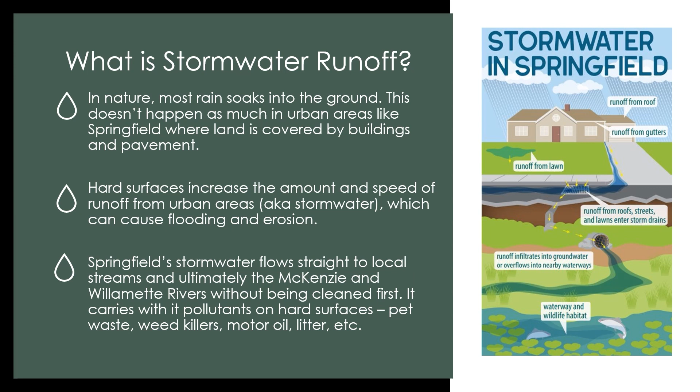Because stormwater runoff from urban areas is one of the main sources of water pollution and alteration of hydrology, it is regulated under the Federal Clean Water Act. In Oregon, the Department of Environmental Quality, or DEQ, implements the requirements within the Clean Water Act on behalf of the Environmental Protection Agency. The MS4 permit requirements are the primary mechanism for ensuring our water bodies are swimmable and fishable. These permit requirements cover public education and outreach, elimination of illegal discharges to the stormwater system, preventing erosion at construction sites, and more.

Directing runoff from urban areas to post-construction site runoff controls, such as rain gardens and swales, is one of the most effective ways to recreate natural hydrology and remove pollutants from stormwater runoff. The City of Springfield is mandated by its MS4 permit to require post-construction stormwater controls at public and private developments. This includes building new impervious surface and the replacement of old impervious surface.

The first step to reduce the negative impacts of stormwater runoff is to implement practices that reduce hard impervious surfaces in the first place. Reducing building footprints and using porous surfaces are two examples of this. The runoff from the impervious surfaces at a site must be collected and retained by one or more post-construction stormwater controls. These can include rain gardens, rainwater harvesting systems, retention ponds, and more.

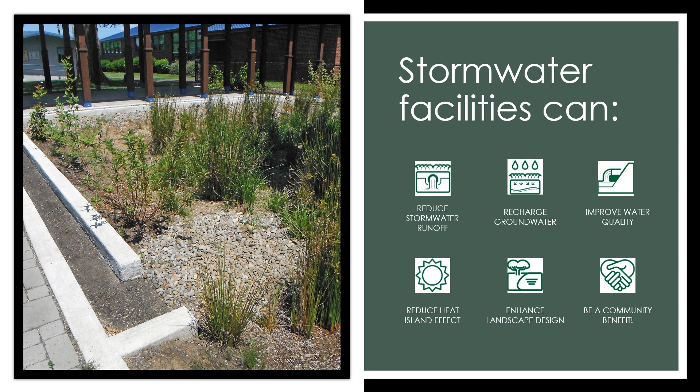These facilities have a host of other benefits, including groundwater recharge, increasing native plants and pollinator habitat, and increasing green space. The plants and soils within green infrastructure are a proven method for reducing pollution and keeping our native salmon and other fish alive.

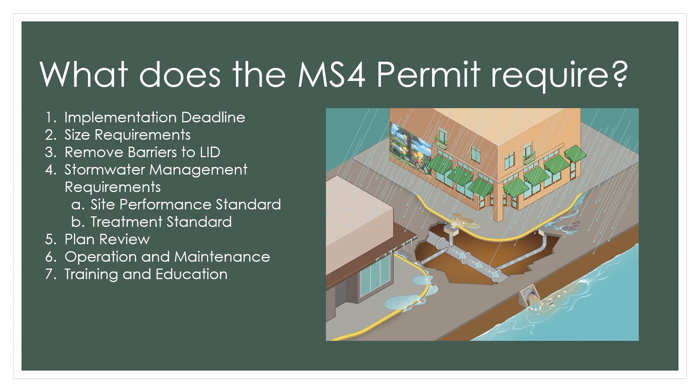As discussed earlier, the MS4 permit requires the city to reduce discharge of pollutants and address stormwater runoff from new development and redevelopment project sites in its coverage area. This presentation will address the 7 topics for compliance with the permit. The City of Springfield must implement all required components of the permit by February 2024.

With that being said, right now we are in the outreach phase of the project. The Stormwater team has drafted edits to the Development Code and Engineering Manual, or EDSPM, and the drafts are available for the public's input on our website or Springfield Oregon Speaks, our public outreach platform. We are also happy to schedule meetings with the public if they have questions and want to meet with staff.

On August 1st, we will hold our first Planning Commission public hearing and expect that commissioners will hold the record open to deliberate later in September. Once a recommendation is issued, staff will take final drafts to the City Council on November 6th. Approval from City Council and the Board of County Commissioners is expected in January and February 2024, respectively.

Next, the City must adopt through ordinance or other regulatory mechanism a size requirement for project sites that discharge stormwater to the MS4 and create or replace 5,000 square feet or more of impervious surface area, or for development projects that disturb 1 or more acres of land. Runoff from these developments must be captured by structural stormwater controls, which are physically designed, installed, and maintained facilities that prevent or reduce the discharge of pollutants to minimize the impacts on water bodies.

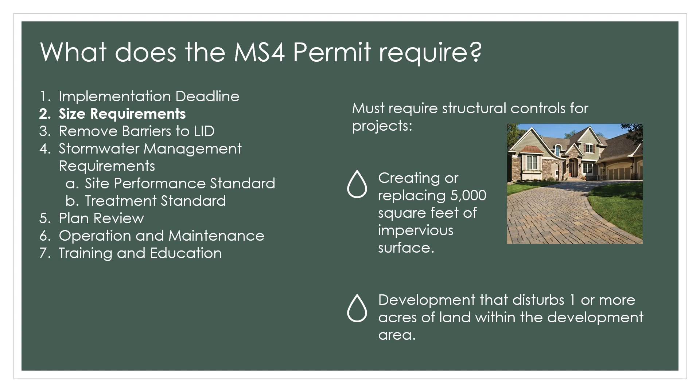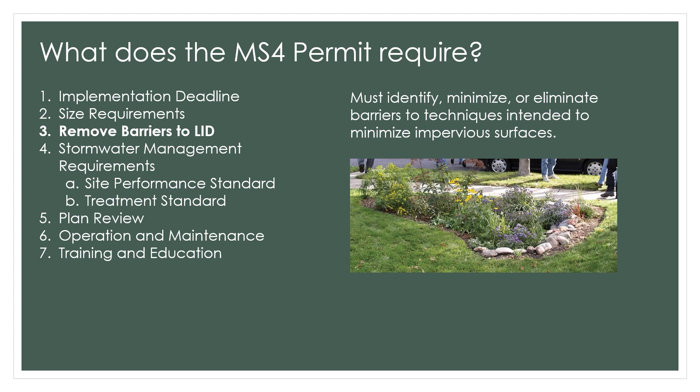The city does not currently have any barriers to low-impact development, but our current standards are scattered across several different documents and some of it is subjective and hard to use. In the revisions to comply with the new MS4 permit, we have made changes to encourage development to use a low-impact approach to stormwater management. The proposed code and EDSPM changes will provide a clear way to meet the requirements using straightforward tools, especially for small-scale developments.

We have adopted the City of Eugene stormwater facility size calculators to be used for developments less than an acre in size, allowing non-engineers to design LID features into the site plan. The Development Code has clear allowances for using the vegetated stormwater treatment areas in required setbacks, and the vegetation that counts as part of the required site landscaping. The plant and tree lists have been updated and reformatted to be clearer and easier to use.

A new section in the EDSPM has guidelines for use of pervious pavements to reduce overall impervious surfaces and meet the new on-site retention standard.

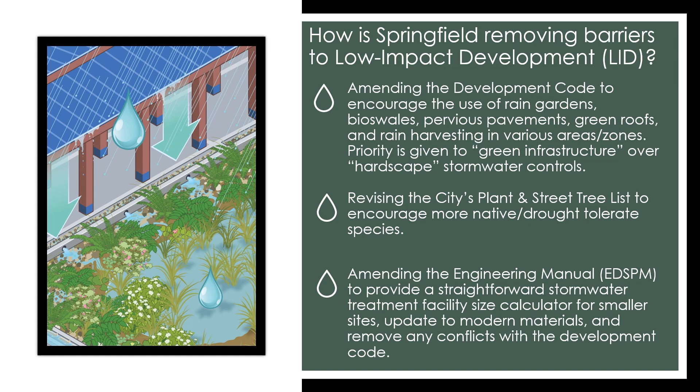The current code does not have any specific performance standards for runoff other than limitations on downstream capacity of the storm system, which could be difficult to establish and was subjective. A large part of the current city's stormwater system is at or over capacity, and this results in most current development being required to infiltrate as much water as possible on site currently.

The proposed standard is to retain a total volume of water equal to 1.4 inches of runoff from the site in 24 hours. The volume is the same as the City of Eugene and is based on data analysis of the historic rainfall amounts so that 80% of all storm events will not generate runoff from sites that meet this standard.

For the sites that can meet this standard, we'll primarily do it with on-site infiltration in stormwater treatment facilities, and the use of a volume standard encourages a low-impact approach to site stormwater design, and a large amount of the City of Springfield has soil conditions suitable for on-site infiltration. The city's proposed new code is also adopting all the same standard vegetated facilities that can be found in the Eugene Stormwater Manual, which when sized with the calculators are able to show if the site meets the standard for on-site retention.

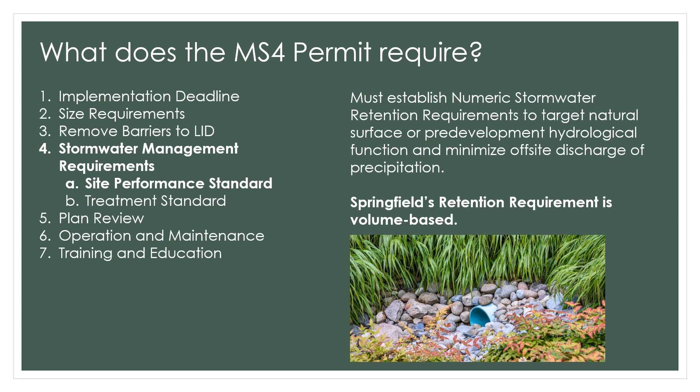Where the retention standard can't be met, then the runoff is still required to be fully treated before leaving the site to a standard that removes at least 80% of the total suspended solids. This should be done primarily with vegetation and only mechanical treatment used as a last resort.

There are clear requirements in the proposed development code for what conditions warrant a reduced volume in the case of limited infiltration capacity or no infiltration capacity available. In the case of no infiltration capacity available, a flow rate standard is supplied in the development code. The provided calculators already have this built in as available options when site conditions warrant them, and where mechanical treatment is approved, the state of Washington's TAPE list is to be used for evaluating mechanical treatment effectiveness in meeting the required 80% reduction in total suspended solids.

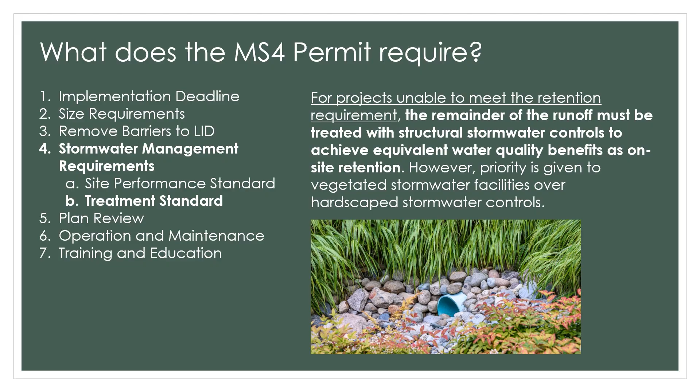The site performance standard of 1.4 inches at 24 hours retained on site, and then quality treatment to remove 80% of the total suspended solids for sites that cannot meet this standard will work together so that runoff generated from new development in Springfield will meet the requirements of our MS4 permit, will maintain and restore a more natural hydrologic cycle, keep our stormwater drainage system from being overwhelmed, and help keep our rivers clean.

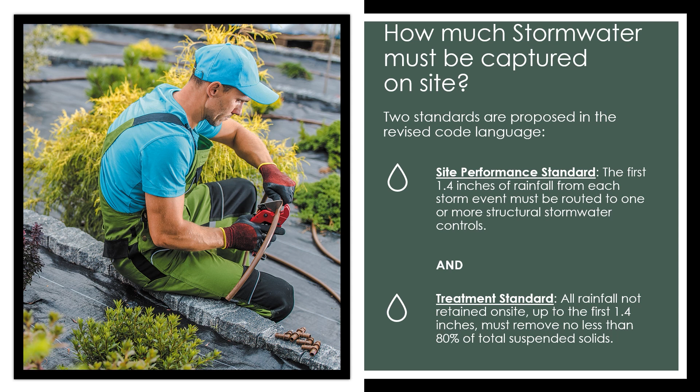Numerical standards are required by the MS4 permit. Research for what would be a reasonable standard for our community led us to mimic the standards used by the City of Eugene for rainfall. This numeric standard was chosen so that 80% of all storms will be treated and infiltrated when possible on site. A common industry standard is to test for 80% removal of total suspended solids, and most current proprietary mechanical systems and practically all properly built and maintained vegetated systems meet this standard.

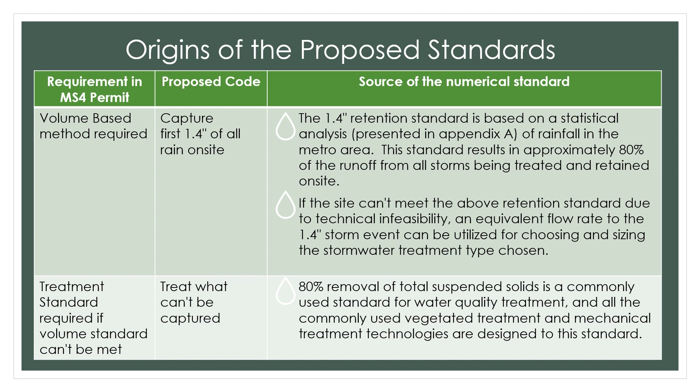For projects that trigger the size requirements and choose to implement either the site performance or treatment standard, the city will continue to review and approve plans for consistency with the ordinance and development code. The amended Springfield Development Code outlines the requirements for stormwater study standards and their types. Two stormwater study types are permitted: a small site stormwater study and a full site.

A small site stormwater study may be completed for sites that are less than 1 acre in size, meet the site performance standards in the Springfield Development Code for stormwater, and do not contain or abut a floodplain or wetland. For sites that cannot meet the small site, a full site stormwater study is required. Each stormwater study must contain a written narrative describing the stormwater management approach, a hydrological study map, a report that describes any impact to a floodplain or floodway, and calculations to establish runoff volumes, peak flows, and pipe size.

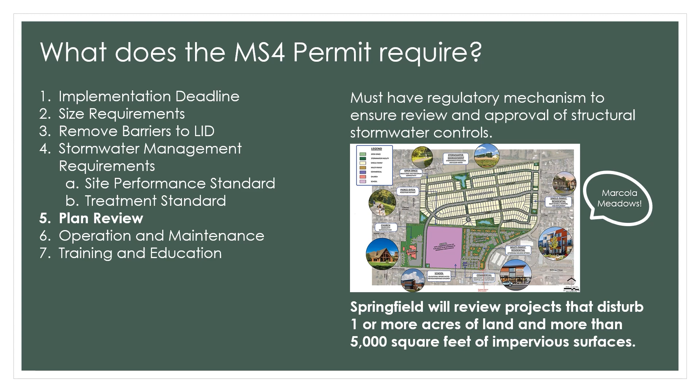This amendment project includes not only the Springfield Development Code, but also the Engineering Manual, or EDSPM. There's an important distinction between the two. The Springfield Development Code governs land use and development within the city's urban growth boundary, and the Engineering Manual contains standards and procedures for public infrastructure, including our transportation, sewer, and stormwater. As part of this amendment project, sections of the EDSPM that apply to private development, such as site plan review or land divisions, will be added to the Development Code. Construction specifications and design standards that only apply to public infrastructure approvals or that are non-mandatory guidelines will remain in the EDSPM.

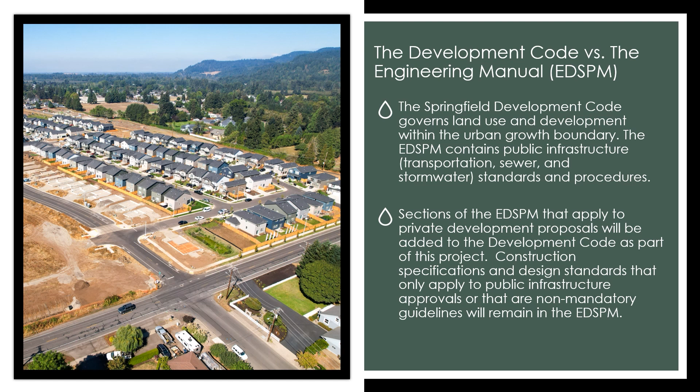Maintaining green infrastructure is crucial for ensuring the long-term effectiveness of these facilities and for meeting our water quality goals. The MS4 permit requires the city to ensure that structural stormwater controls installed in Springfield are operated and maintained to meet site performance standards. Developers are required to sign an operation and maintenance agreement and provide an operation and maintenance plan for each type of stormwater facility at a site. The operation and maintenance agreement requires the responsible party, typically the property owner, to regularly inspect and maintain their facilities according to the operation and maintenance plan.

Operation and maintenance requirements include ensuring good vegetation coverage, at least 90% at maturity with approved species, and maintaining soil permeability. This is because plants are the primary component of these facilities, removing pollutants and increasing infiltration. In addition, most of our drinking water in Springfield comes from groundwater, so it is especially important to have good coverage with healthy plants.

The City of Springfield's MS4 permit requires us to provide education and outreach to contractors, developers, planners, engineers, architects, and the general public about the impacts of stormwater runoff on water bodies and the steps that can be taken to mitigate these impacts. The purpose of this workshop is to inform the development community about the new requirements within the City of Springfield's MS4 permit and to gather feedback from you about our proposed code changes to meet these requirements.

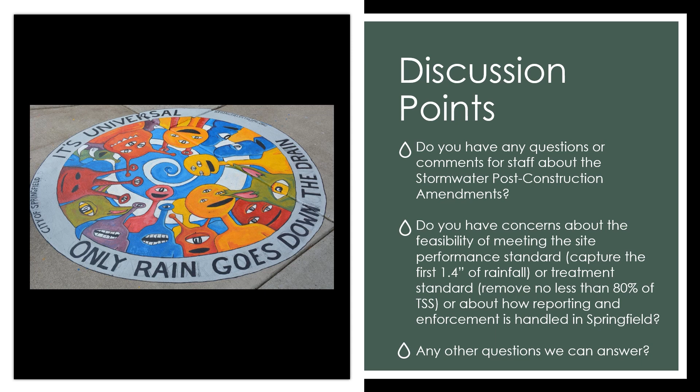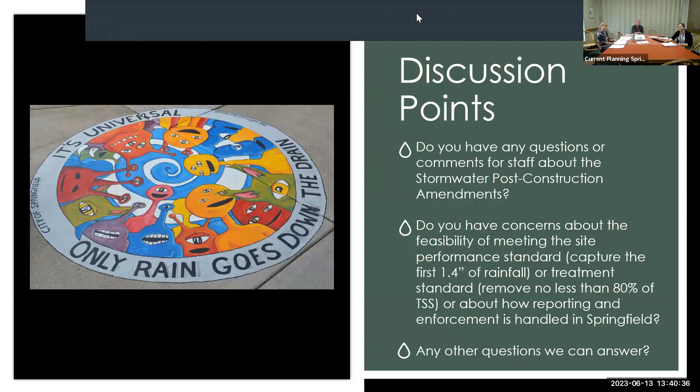Would you be able to summarize maybe the difference between how the 5,000 square foot limit, or is that a maximum? Or no, I guess it's a minimum. Is that a minimum?

All right, we're working on the volume internally now a little bit. We have our volume up very high so you guys can hear us. Yeah. Or our recording. What was that question again? I'm sorry. Yeah, I guess I was having a little bit of trouble hearing the recording,

but there was the 5,000 square foot, like, is it the impervious? Yeah, 5,000. So our new threshold for requiring a stormwater report is 5,000 square feet of new or replaced impervious surface on the site. If it's below that, you still need to show in the site plan where the drainage is going, but you don't have to do a stormwater report, nor do you have to introduce any water quality measures. With the quick exception, there's different rules that apply to middle housing, and if there's no outlet to the public system, you still then have to manage it on site, same as it is right now.

Okay. Roseanne, I don't know if you're the first person to raise your hand, but we'll tap you in next. Do you want to ask your question? Yeah, thank you guys. Good morning, afternoon, sorry.

So I think my questions are about sort of before and after, because I'm just getting started working in Springfield. So essentially, I'm curious about the planters and the swales, some of the BMPs and LID opportunities that might have been used with some consistency in the past in residential subdivisions versus what will be more of the norm going forward.